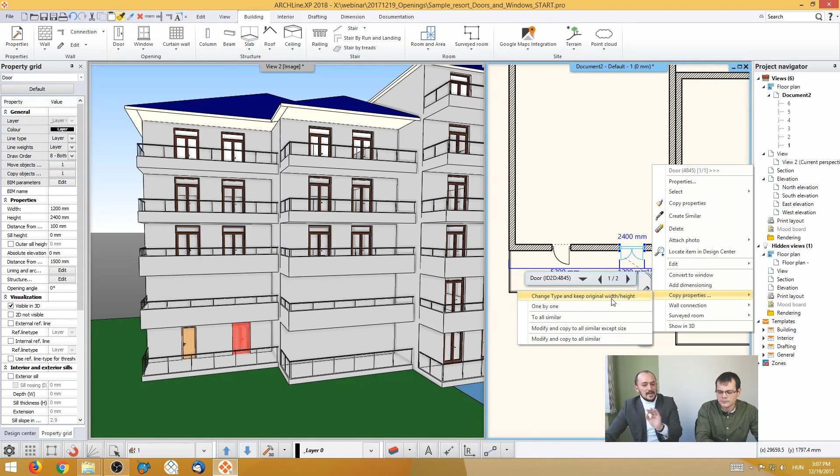If I do that, now these match in shape and geometry, but the size is kept. That's the regular way it works - it will keep the original size, so you don't have to go along and change everything manually one by one. The same thing you can do if you just click here and use the local menu, called copy properties, and that's quite properly named for the way it works. So you can use this tool as well.

Also, you can go into the libraries. Let me talk about that a little bit before we go on to the other parts. If you click on the properties of the door, you can find and tweak all these details.

You can find one thing we call the distance from wall line. Let me tell you what that does. If I change this distance from wall line to 0, see, now it's in line with the wall face. If I undo that, you will see it was originally 100 millimeters, and now it's something completely different.

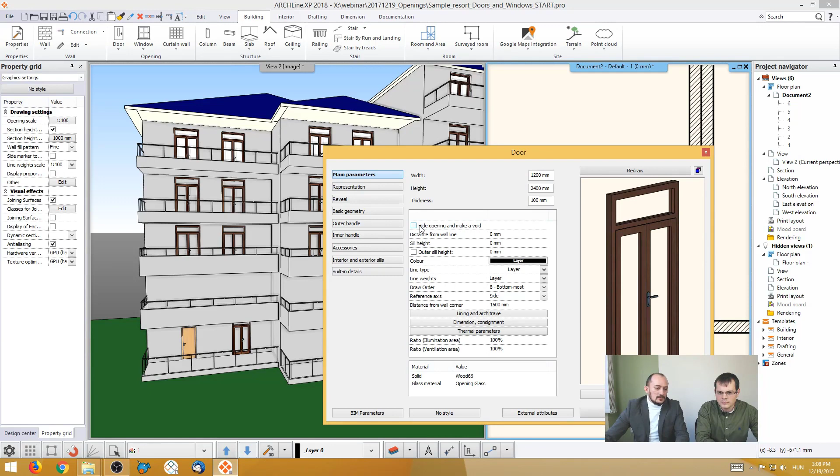So this is also something you can change here or in the properties. Actually, you can turn any of these doors or windows into an opening by simply ticking this option and saying okay, and now you have this as an opening, which won't work with this external door of course, but as you can see, you can do it with that.

You can also graphically change the size of this door. If you would like to match to a proper point on your existing drawing, you could just click there visually and then enlarge it.

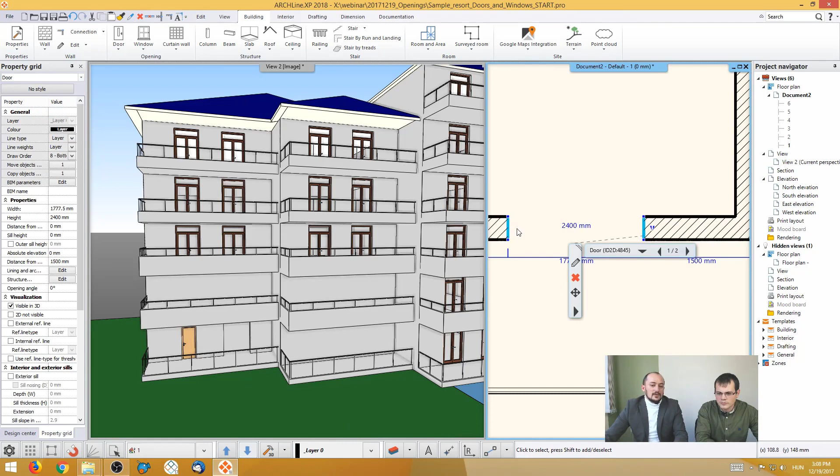And also you can go to the properties to fine-tune other things, like the BIM parameters. Each and every item in ARCHLine comes with a BIM parameter list, which you can either use the existing parameters, or you can go and add custom parameters. Whenever you find this add parameter button, you can just add new ones, or you can use the classic IFC parameters.

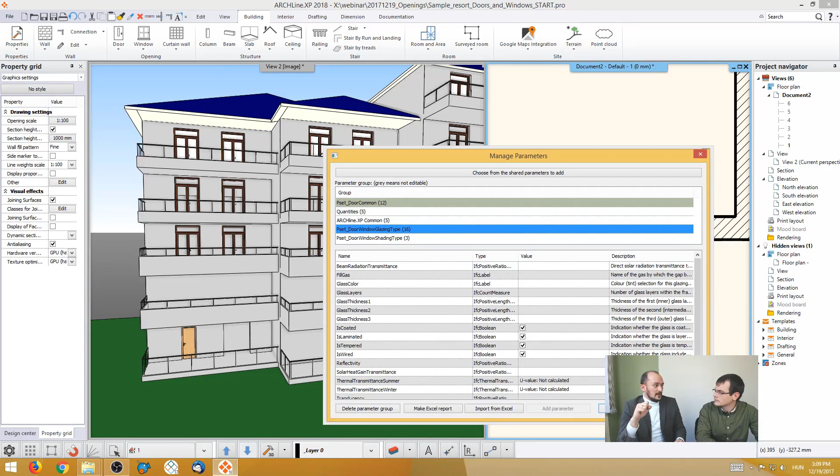That becomes even more relevant if you start working with other co-designers' files. Most importantly, this means that not only the geometry can be exported, but also this data, everything can be exported into an IFC file. So if someone else works with another software and another professional would like to work with your model, they can do that easily.

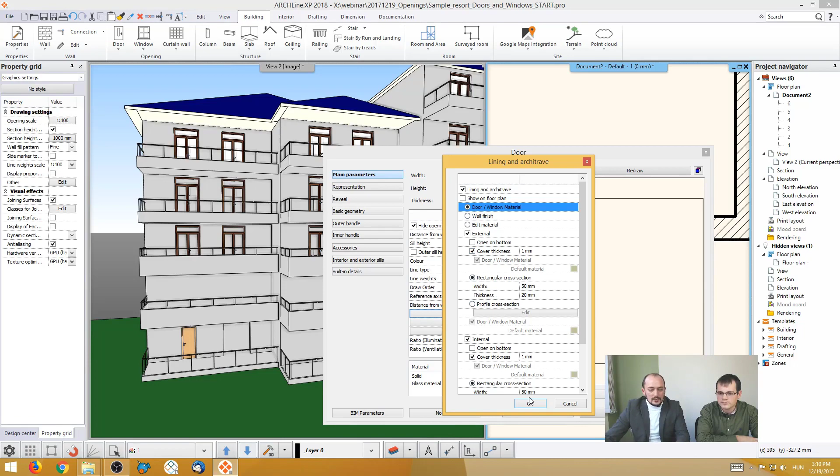Actually, you can turn on something we call the lining and architrave. I think in some countries this is very important. If I turn it on, external and internal, and use the same material that was set for the door and window, then it will automatically generate an architrave or a lining, as we can refer to it.

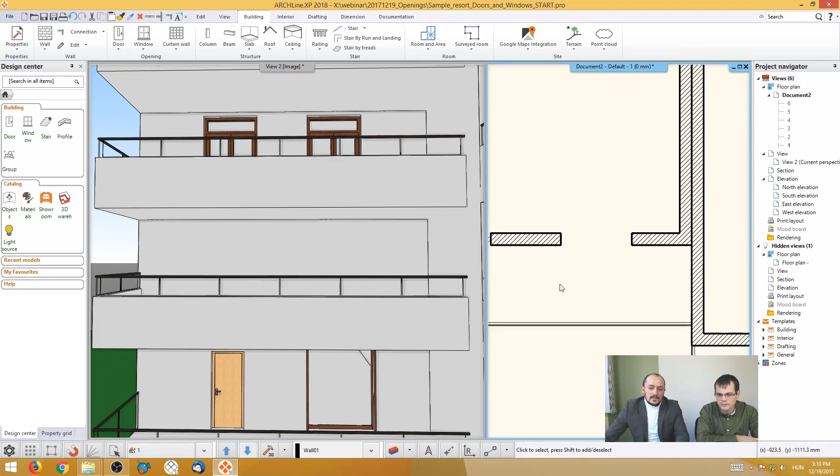So this you can do, and it's something you can copy over and over to all the doors and windows. It will add additional detail, and it can also be represented in the 2D. That's one thing, and another thing I can show you someplace else.

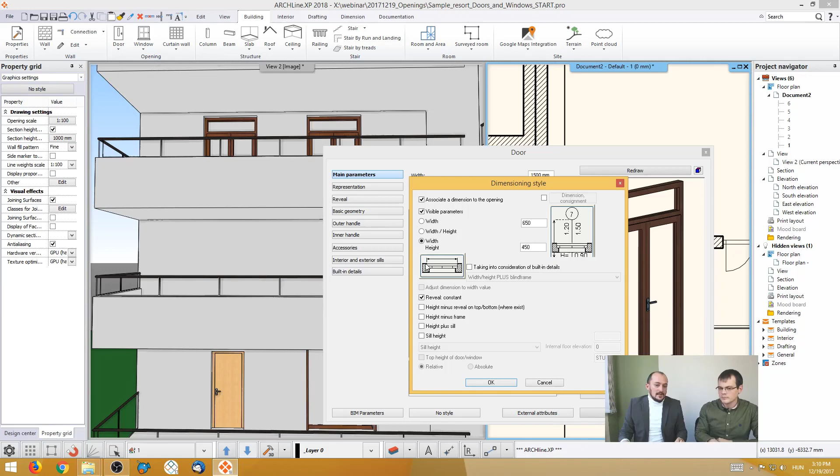There is another feature called dimension and consignment. Here you can set up what sort of dimension in what style you would like to represent, and you can even turn it on automatically, so the moment you place doors and windows, they get automatically associated with dimensions if you tick this option. But now I just changed the existing one, so it will automatically measure the size.

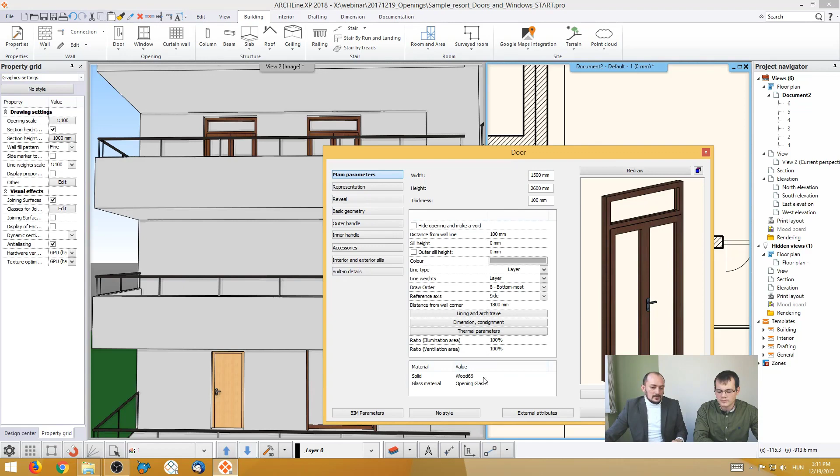So that's one thing, and here in the properties I just would like to highlight there are several other parts you can simply change, or you can just change the material, not just the size, not just the basic geometry. And here is the library, and now we can go on to the next.

One thing to talk about at this library is that obviously it is not limited to just double doors. You can go back in this tree structure and find all kinds of different elements.